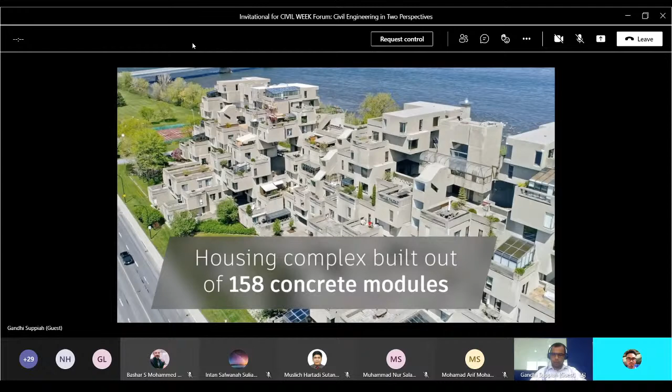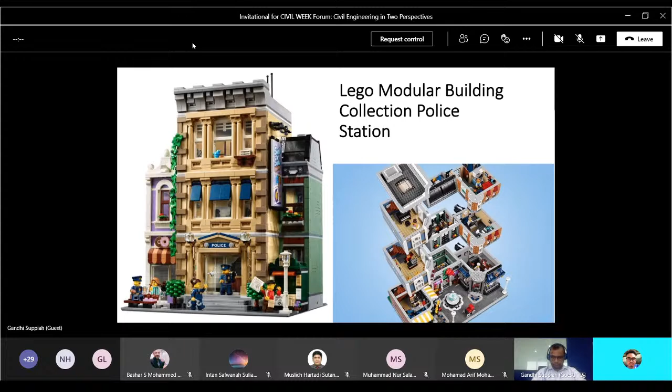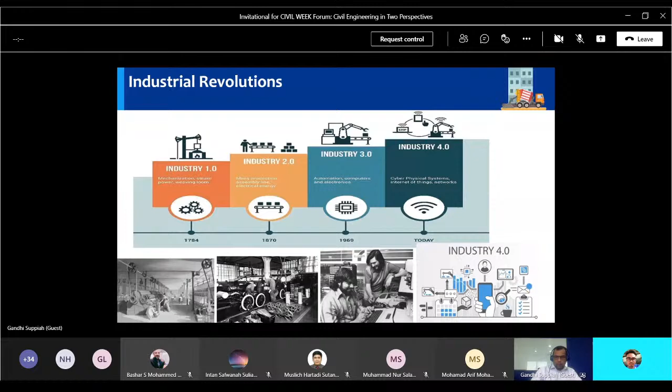We are now scaling up prefabrication more than ever. There was a period of time between 1969 to today where prefabrication or modular thinking was not thought of, wasn't popular, simply because people didn't want to live in the same sort of houses and same development, and therefore it dropped off in the 80s and 90s, and people weren't thinking about modular construction. But now in the 2000s, it's back in the frame, and that's what we're going to go through mainly.

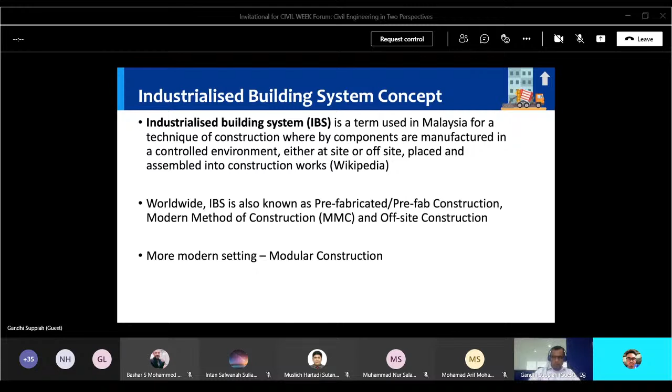So IBS, modular, and so on — it's a very simple concept, nothing difficult about it. It's really about having an architect draw up the plans, put it into a setting where you can think about using prefabricated components that can be manufactured together.

Then you go through and look at how many components you need, what type of components, how to scale up, how to set this up in the manufacturing context, and then start building it. You just start building it, put it on the back of a truck, take it to site, use a crane, and lift it in place. That's as simple as that.

Nothing too complex about it, in the sense that it streamlines the construction process, streamlines thinking, and allows things to be done faster compared to still building formwork and pouring into formwork on site, with the amount of wastage and the use of extensive foreign labor involved.

So IBS was thought about in Malaysia from that perspective of how to have better quality, better safety, and less wastage.

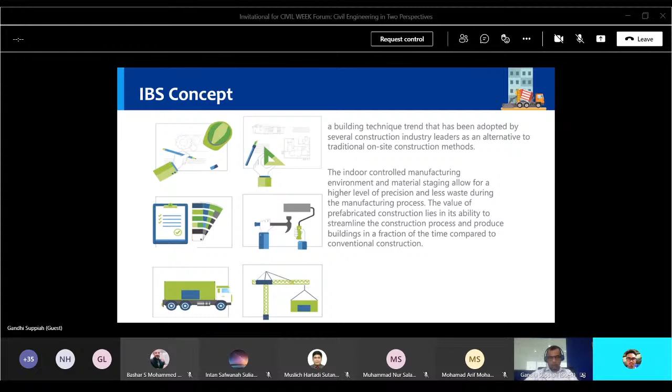But in Malaysia, it still hasn't really taken off. It hasn't become a big concept, although I was privileged to work with Dr. Kim Elliott in the early 2011, and I was one of the working committees for construction research about CREAM in Malaysia, where I contributed to the specification for IBS. You can find it on the internet and download it. It's a specification, but there are things I think you'll pick up that are good for research at this point in time.

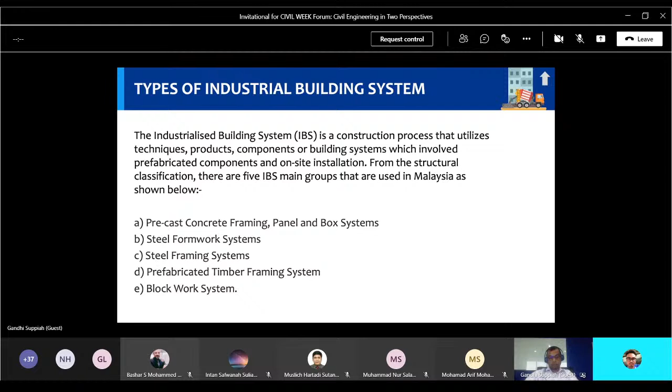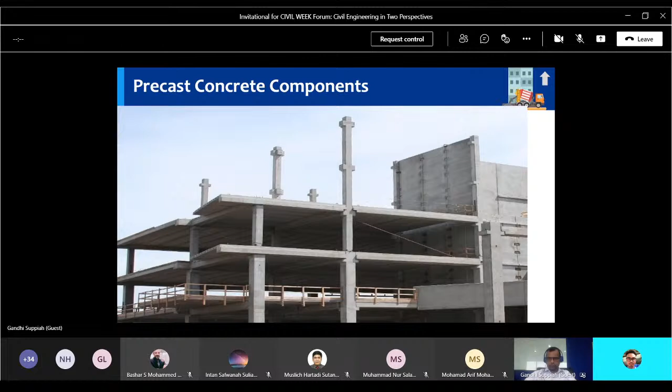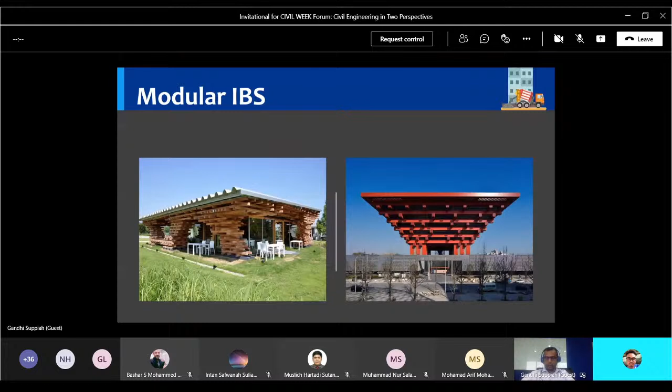But what you need to realize is the speed of construction here, and the number of people used, was lower compared to any standard buildings. Particularly the Shanghai Expo, this building is quite significant, 20 stories in height. It's an inverted pyramid with a lot of structural thinking, with a steel core holding it in place with piles, I think bored piles, as part of the foundation element.

Timber composite - as I mentioned, we don't use it that much - but construction using either pure timber or timber with concrete floors, that could be done either for internal floors or even for roof or walls. This gives quite a bit of rigidity to the building, but also durability built into it, and they could be made into panels offsite and lifted into position. Very quickly you can get through the other trades in there, like electricity, plumbing, and so on, because you're talking about timber wall panels that you could drill in, direct your electric cables through, or even pre-drill and decide where you want to go. This is an extremely fast form of construction used mainly in European countries, and that comes with insulation built into the wall and the roof, so it all comes together as a single component that then gets erected.

So I was working in South America, in the Falkland Islands, for about a couple of years, and I shipped in 20 containers of houses on a similar concept, where each container contained one house, 3-bedroom or 2-bedroom, and it was like Lego. The gangs, each house had a gang of 3 people, and they were able to get the components out and fit the house together with very minimum fixing requirements in terms of nails. I mean, yes, some screws, but they were all Lego - they had their own wood peg requirements in place, and each house was done in under a week. That was really, really fast. The foundation took longer than the house itself.

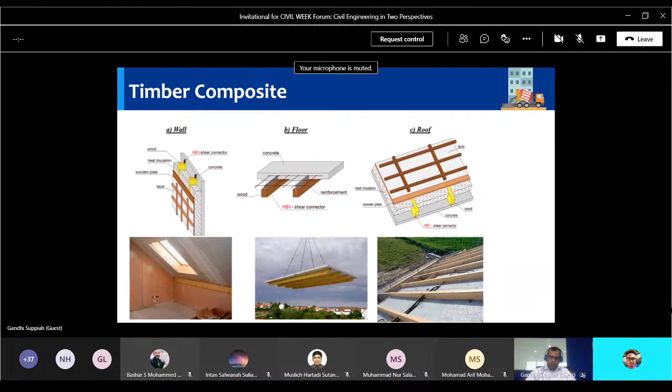So why modular? As you can see, standards - it's very precise engineering in a very manufactured environment that delivers consistent standards. You can have repeatability in a good setup. Doesn't matter how varied it is, what type of construction standard, whether it's BS 8110, EC European codes, or ACI American standards - it doesn't matter. You can engineer this in a very controlled environment.

The cost of constructing this on site is really, really low, and building this fast compared to traditional construction, where you can have delays from either material damage or variability. Variability in a lot of buildings comes from foundations, and when you do in-situ construction, you can end up with quite a bit of variability, and you could end up with various defects that develop over time, over the life cycle of the building, due to that variability. So modular construction, in life cycle terms, is cheaper, but what is not so cheap is setting it up initially to get the modular construction in place.

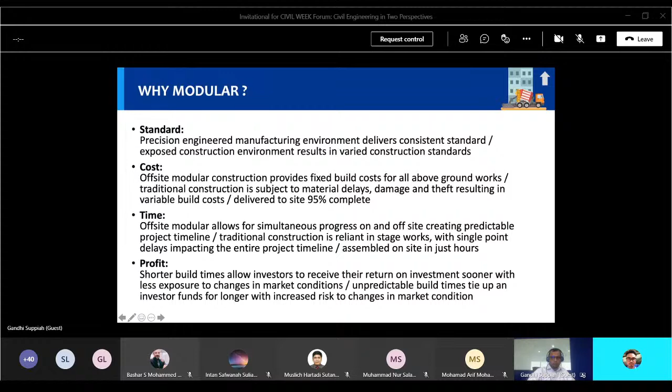So, what I meant about modular construction time savings.

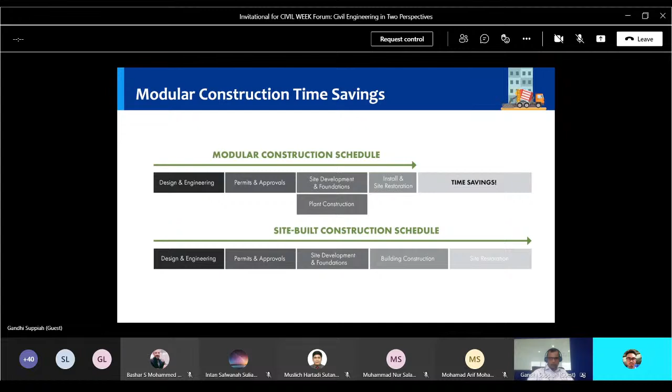When you look at traditional, site-built construction versus modular construction, it's pretty similar with the design, engineering, permits, approvals and so on, until it comes to the site development stage. In modular, you can get your plant constructing your components off-site in a controlled environment, and it's after this that building construction starts on site. Traditional construction is going to take longer, and when you look at that install and site restoration, it is significantly faster than traditional building, with a significant time saving.

This is a recent article from McKinsey that shows when you compare a 24-month construction period, traditional versus off-site or modularity in place, you can be between 20 to 50% faster. You could finish what might take you 24 months in 12 months. That's incredible - as an investor, you are getting returns faster, and as a person who's bought a property, you can move in faster.

You can see what benefits you can gain out of this, particularly when it comes to 3D volumetric construction using a modular construction technique.

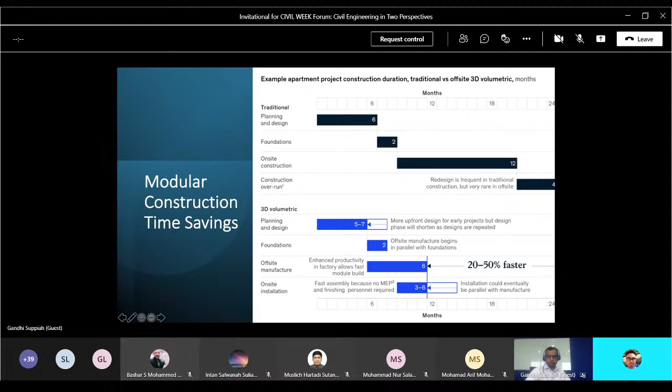So where is modular construction going now? Where is the direction of modular construction in this current space in time? With the Industrial Revolution 4.0 in the last few years, building information modeling is becoming more and more popular. I know we are still in the adoption phase in Malaysia, not used as widely as it should be compared to some of our neighbors and some parts around the world.

For argument's sake, in the UK, adoption of BIM in the construction industry is as high as 80%. In Malaysia, we are still lagging somewhere between 15 to 20% depending on the type of construction, and we have actually done more BIM in linear construction, that is highway construction, at this moment than actual buildings, although it is gaining high traction.

If you look at the image on the bottom right hand corner, that's actually an augmented reality setup, or even in your virtual reality space, where you can see where the modular construction elements are, how you position your MEP - mechanical, electrical, plumbing devices - and how to avoid clashes. You can do clash analysis using tools like Revit.

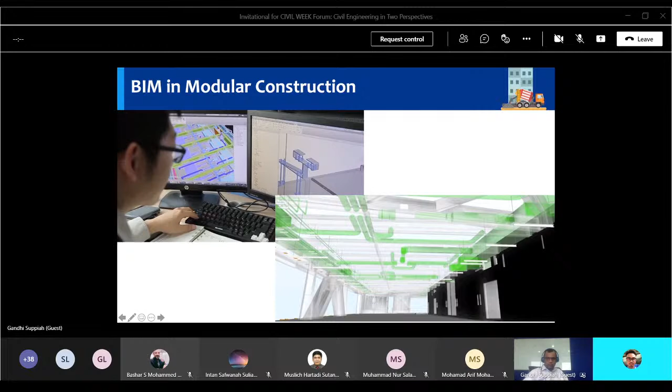This is a BIM module - it's a unit workflow using Autodesk, where you can look at all your modular components, segmentize them, and see how the modular elements are all tagged. Each one has its own specific identification, and they can be put together in a virtual space, constructed virtually before you go on site.

But what it also shows is the decrease in project budget. Now this is a bit of a controversial thing, particularly in this part of the world, because for engineers and architects, the project budget dictates their fee. So pushing modular construction and advanced technology has not been popular, because it can in effect reduce your fees. But I think we need to change that mindset about how engineers bring value using technology and modularity as a modern method of construction, and therefore they should be paid accordingly, not based on project budgets. Rethinking has to be done.

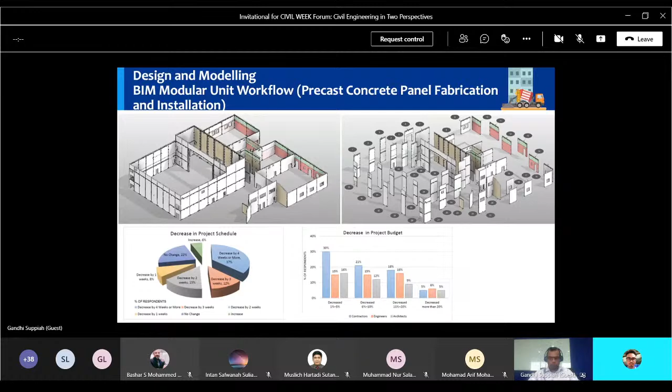BIM also in modular design can be used for site layout planning. You can plan how your lifts are going to be, how you want to position your crane, how you're going to lift components, how you decide on a lifting plan, and how you sequence your stacking.

And this is all done virtually now. This is quite standard practice nowadays in modular construction. If you look at some of the modular construction jobs, they've used this planning to go up to 4D to 5D sequencing, to ensure they can plan it, sequence it, measure it, ensure safety is part and parcel of this, and cost is measured carefully, so everybody knows what they need to do. This is a very collaborative framework, and these are the advanced construction methods now being used.

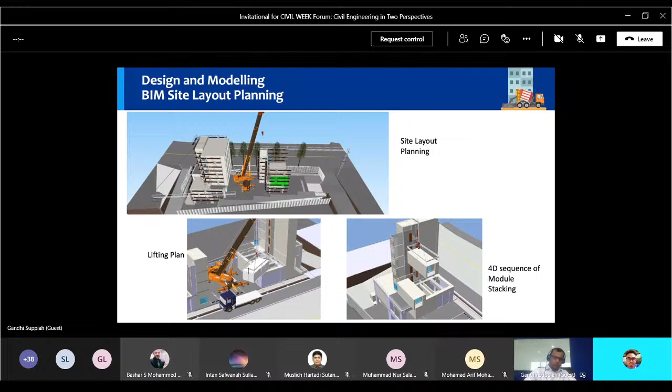Malaysia really is getting in there, but it needs to do more of this. For those in university now, it'll be worthwhile to learn this, because with future plans in Malaysia to build 100,000 homes, and Singapore looking to have major construction over the next few years for various modular buildings, and so on in the rest of the region, understanding this concept and knowing how to use it would be a great asset.

A building that used to take maybe 18 months for steel framework is now 50% faster easily, and the number of people working on such jobs is about 30% compared to before. There's not enough being done in this space in Malaysia at this point, but with new data centers and new requirements for various industries coming up, the modular construction with steel framework will come back. I think in the next 2 to 5 years, this will be one of the major areas pushing back up in the industry.

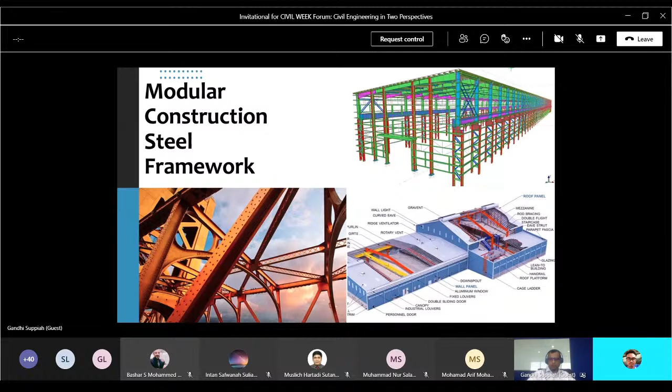Gamuda is one of the leading proponents of IBS in Malaysia, or more so modular construction, because they're talking about wall panels, not just individual components but volumetric construction, compared to some manufacturers who are doing just column beams, hollow core slabs, and so on. So I think it would be a good idea, once the MCO is over and things are back to normal, to organize a site visit to Gamuda's manufacturing facility, because it's a great place to go and learn about how modular construction is done in a very controlled environment.

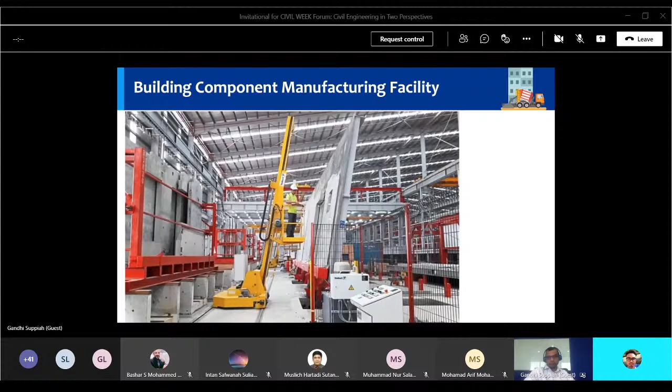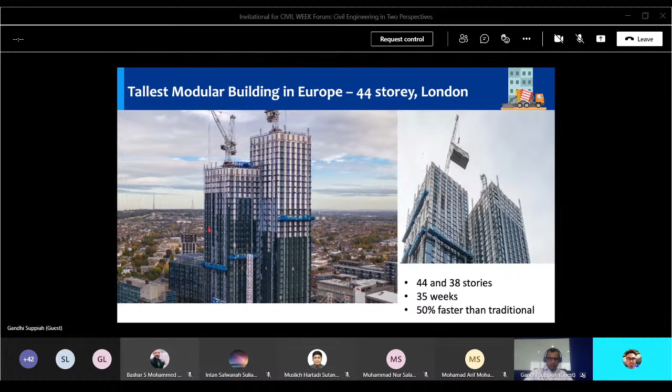So you can see where and who is leading this at this point in time in this part of the world. There are significant opportunities, and part of it is they're looking at reducing reliance on foreign labor, which is why Singapore is doing what they're doing, but also aiming for fast-paced, cheaper, but safer construction.

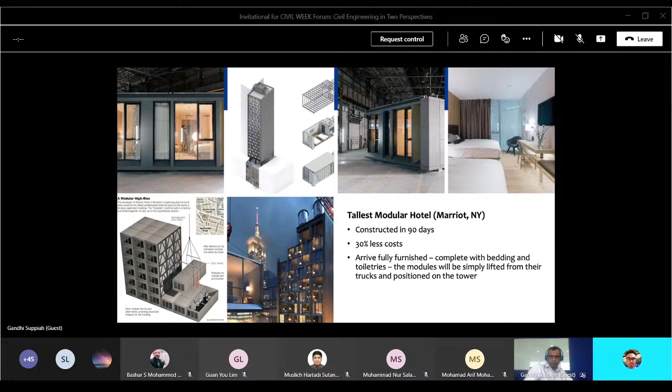Now I come to something closer to me. I'm a bridge engineer, but I've been involved in modular construction, IBS, or precast systems for quite a long time in my career. I also started my career in a factory, as a bridge engineer, on a short-line precasting facility, where we did box girders for a bridge across the Tagus River in Portugal.

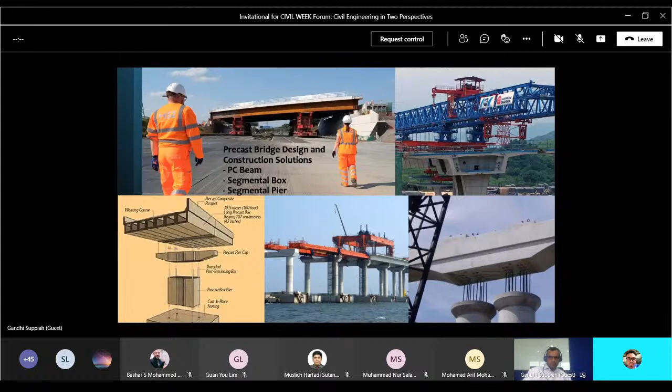But there are a lot of other variations and innovations where bridges could be constructed with purely beam and slab, with an in-situ slab or beam, or you can see components like precast piers, precast box piers, or pier caps, even casting. Even the footing sometimes can be precast, but in most cases it will be cast in place. This is high quality precision work done in a factory environment, or even outdoors with control required to steam cure it to achieve the same quality as an indoor environment, then brought into place and placed quickly.

Now the next evolution we're talking about is the modern method of construction, the offsite manufacturing. You can see the Marriott Hotel in New York is very similar to offsite manufacturing, but the reason it wasn't classified as modular is there's a variety of different components and elements of construction that meant they didn't fully classify it as offsite manufacturing.

Here, the whole components are manufactured completely offsite and just come and stacked in place. You could have shipping containers to do this, and there's a variety of homes now built with shipping containers as part of sustainability, or a circular economy, using shipping containers that aren't being used to construct homes, classrooms, different buildings.

The speed of production is even faster than modular construction. It is cheaper to some extent when using steel framework. You don't need to do major setup compared to a concrete framed modular building or even offsite, because concrete particularly could be quite heavy to lift, while steel is faster and quicker to do such things.

It's validated, it's tested on site, off-site first before it comes and installed, so everything is checked out. Safer, very few labor is required to do such things. Completely done classrooms can come in place, or as you can see, hotels, hospitals even, can come completely manufactured off-site and then be put in place, and could be there within 2, 3, 4 months.

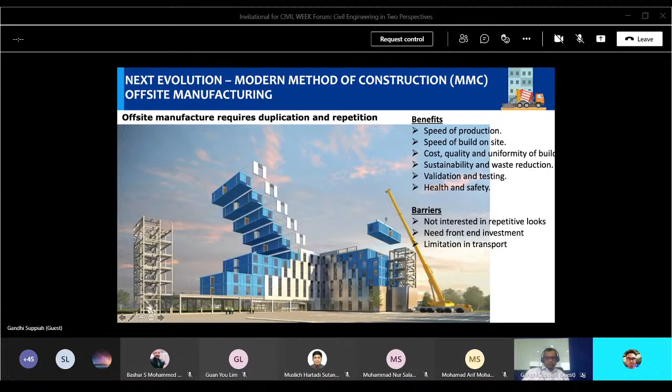So the next evolution in this, of course, is 3D printing, additive manufacturing, where you are talking about robotic arms or a gantry crane type system, which is printing using sustainable material, like rice husk combined with cement additive. So it has a sustainability element built into it, and it is very fast - you can have a home constructed within days when you use such systems.

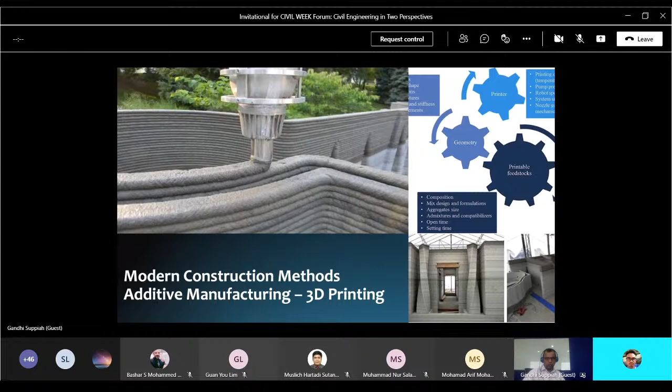And Malaysia has and is considering manufacturing, but then we need to tackle modular construction first before we jump into additive manufacturing. But then I think we should look at doing some trials in the future and see how fast we can build in rural areas and get housing done for people who are in desperate need of good homes.

This is just an image of a 3D manufactured home using additive manufacturing or 3D printing. It's a virtual model that looks at how it will be done and how even the roof components can be put in place using different cranes. It's a game changer. It is going to happen very fast, and you're talking about just 2 to 3 people on site, and you can have homes done that look different. You don't need that repeatable look from off-site manufacturing - you can have architecturally looking homes with 3D printing.

So what's the future demand for modular construction? If you look at modular or off-site construction, and the increasing scale and complexity of the different types of components, it's now being driven by the cost of labor going up, but also the amount of foreign labor that you don't want to bring into the country, and the shortages that are happening because of that.

The biggest traction is happening in Australia, which is really big into modular construction. It's also in the UK, Singapore—I showed the building earlier—and the US West Coast. So it's a modern method of construction, a demand that has been driven, and it's growing faster than any other form of construction at this point in time for buildings and housing.

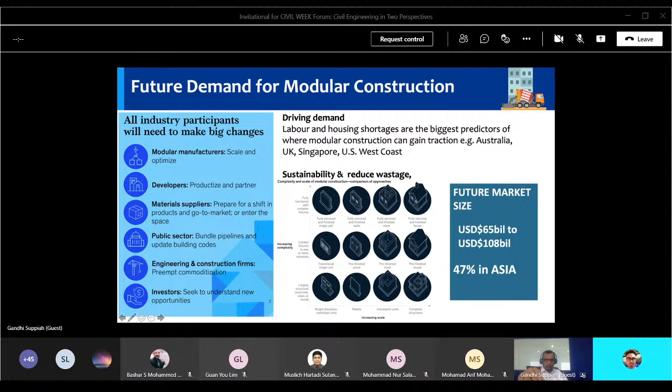Finally, I want to go through future material development. I've got probably another 4 or 5 minutes on this. These are future developments of materials that will be built into the modular construction area, and I'm particularly talking about concrete here.

Ultra high performance concrete—typically in university you learn about grade 30, 40, maybe 50, but I'm talking about grade 80 to 150. When you use such high grade concrete, you can slimline or make your components thinner with similar strength, but you have to tackle durability and brittleness issues. It can be tackled though—I've got a bridge I'm working on right now using grade 110, and KL118 is also using somewhere in the grade 120 to 130 range for their concrete, to make components like their core walls thinner.

The next one is light transmitting, or light-emitting, concrete. We are now developing concrete that is able to absorb light and emit it during the nighttime—like built-in photoluminescence that extracts sunlight over the daytime. So on highways, instead of painted white lines, you can have concrete paths lit up using light transmitting concrete. You can have signboards with light transmitting concrete, or use it architecturally on building facades. All this can be done.

Thank you for this opportunity to address the UTP students, our beloved civil engineering students. I would like to give my salutation to the department chair, Engineer Dr. Bashar Mohammed, and all my colleagues from the civil engineering department. I am truly honored to share this because it has an important implication for the students today.

Now, especially you young adults, you must know that as of today in the marketplace you have people from the baby boomers — I am from the baby boomers, born from 1946 to 1964. You have Generation X, born from 1965 to 1980. You have the millennial generation, born 1981 to 1996. You have Generation Z, born in 1997 or after. And of course Generation Alpha will be coming, born 2010 or after, but you will not see Generation Alpha for quite a while.

Perhaps in 2030 we'll see Generation Alpha coming to UTP. But at the moment, Generation Z is today's generation. Just imagine, I am actually 3 generations behind you guys now. There are definitely a variety of challenges you will see in how people interact with each other. In the workplace today, you will see these 4 generations interacting with each other — with the exception of Tun Mahathir, who is from the builders generation, 1 generation behind me.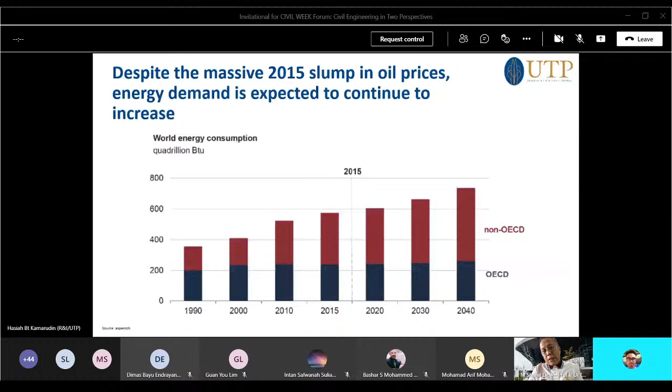Next one, Asia. So as we see the slump in oil prices, you will see that there are a lot of other energy alternatives starting to come in. Nuclear has always been a steady state. Nuclear has always been part of the Western world cartel business. Nobody else is allowed to have this nuclear business.

Iran tried to do that. They got attacked all the time, for example.

And then you have renewable. Renewable is on the uptrend. The green color - depending upon if you are colorblind or not - it's on a rising trend, since the drop of the oil price in 2015.

And then you have the natural gas. Natural gas is supposed to be a clean source of fossil fuel. I think it's probably the cleanest at the moment.

Coal is bad, guys. Ladies and gentlemen, I'm going to tell you, China is one of the worst culprits in using coal. Malaysia is no different. Some power plants are still using coal. You go to Tanjung Bin, we are using coal. You go to Lumut here, we are still using coal. These are very old ways of doing business, but you can see that the demand for coal has dwindled, the energy arising from that.

And then the other one that we have is actually petroleum and other liquids. Those are on the increasing trend. And these are the shift in the energy sector. Next one.

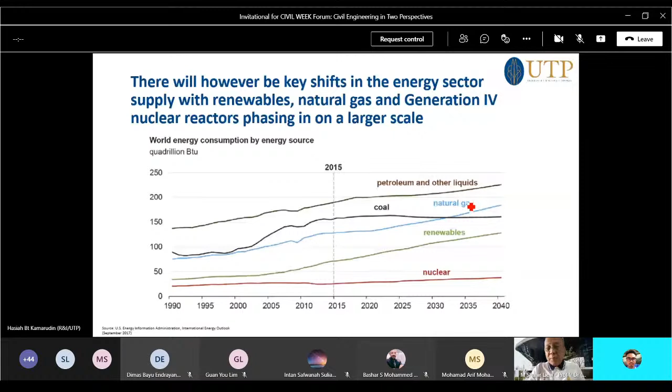And as you can see from here, even though we have a shift in the energy, you see that the increasing lease operating expenditures is reduced in expenditure and capital project, although energy demand is growing. Why is that? Very simple, guys. If you do not meet the average cost per barrel of oil, then you are not going to invest more in finding new fields. This is the problem today.

But fortunately now, I think the oil per barrel is beyond US $60. This is good, right? This is good for everybody. In fact, if you look at US shale, for example, there's a drop in the price over the years. Offshore oil and gas has dropped in price, and conventional has also dropped in price. Saudi Arabia, the largest oil producer, can produce oil for less than 10 US dollars. They can make money for anything that's less than 10 US dollars per barrel. This is the fortunate part about Saudi Arabia.

But the unfortunate part about them, 87% of their GDP depends on oil and gas. So you can see this is a very bad proposition for Saudi Arabia today. They have to diversify their economy, which is why MBS is doing a lot of things to Saudi Arabia to make sure that they diversify their economy.

Brunei is doing that. They are dependent on oil and gas in a very big way. Malaysia today is oil and gas dependent up to a tune of 27% of our GDP. So I wouldn't say it's bad. I wouldn't say it's that good either. I think typically you want to be dependent on oil and gas to about 10% of your GDP. That's about it. So these are some classic examples, because oil and gas are very volatile, traded in the market.

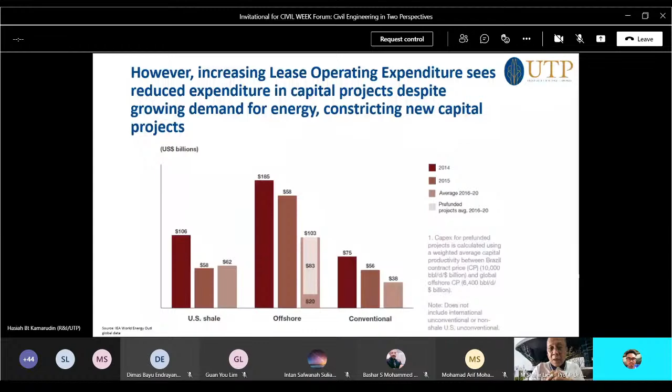It will follow the market trends. Next slide, please. So as we move along, you will see the dwindling effect from the price of oil and gas. It drops from a high of 130 US dollars to 28 US dollars per barrel.

Hey guys, in my lifetime, I have seen a drop in oil prices 3 times. One time when I was in Texas, it was about 8 US dollars per barrel. I was pumping cheap petrol. I was driving a V8, a 5-liter engine that is a major gas guzzler, but I didn't feel the pinch because oil was cheap.

You are looking at that drop, and when you translate that, you have not much margin to play around with.

And in Malaysia, we depend a lot on offshore oil. I think we are doing quite well now. We are moving to a lot of other countries. In Mexico, we have 2 blocks, for example. In Gambia, we have another 2 blocks. In some of the African countries, we are developing some of the fields.

Petronas are typically smarter because we tend not to follow the crowd, in the sense that if there is oil and gas, it doesn't mean that we will explore that. We must make sure that we make money out of it. So we are more conservative in our approach.

So what I'm saying is, digitization, what else can you look at when the oil price drops? When the oil price drops, it means you have to cut costs. Your fixed costs, you cannot change that.

I have an offshore platform. I have people operating from the offshore platform. I have my business that I have to go on. I have to produce 100,000 barrels of oil per day. I have to continue to do that, and that will keep on coming out from the ground. As long as that's coming out from the ground, you need to balance it. And the only way you can balance it is through operating costs.

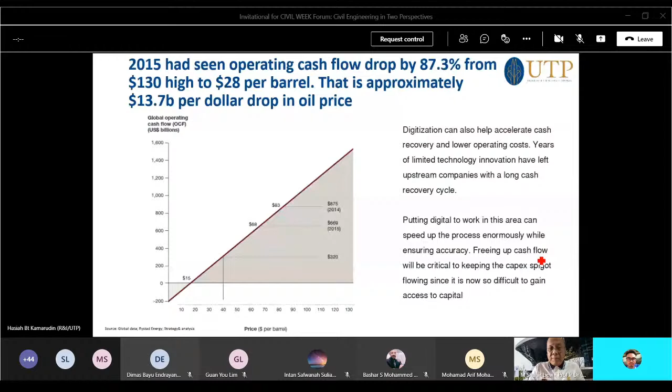On top of the 2015 oil crisis, you will find that new trends have emerged, changing the energy outlook considerably. First, you will see the rise of new hydrocarbon resources - that is where you look at unconventional oil. America is very smart. They always buy oil, keeping theirs as a reserve. Anything goes wrong, they start digging their oil, and then they push the price down.

So Saudi Arabia and OPEC countries no longer control the world market. You guys got to remember this - there's no way they can do that anymore, like in the old days during the Yom Kippur War between Egypt and Israel. The other one is a changing geopolitical equation. Things are changing very rapidly. You have to admit that we are part and parcel of that changing geopolitical equation. China is coming to the South China Sea. I think the Mat Salleh suddenly realized they made a mistake by calling it the South China Sea - they should call it the Malaysian Sea.

Malaysia can claim that it's our sea. Now we got South China Sea, China is claiming the whole sea belongs to them. This is the unfortunate part.

The other one is greater penetration of renewables. There are a lot of innovative ideas in renewables, and then you got new technologies and material for hydrocarbons. I think this is something we look at. We're going to look at other kinds of material for pipelines, for example.

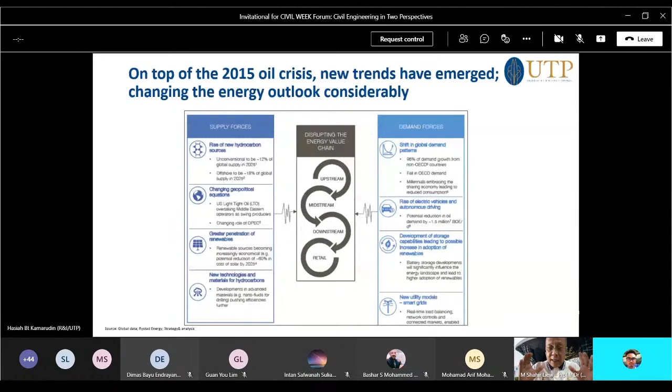So there's a lot of research that has been done. UTP has been part and parcel of that. Petronas is doing that as well. In short, there are a lot of things that is not perfect science, perfect engineering as it is. At best, it is an experimental stage. Tesla is an experimental stage, for example, and so on.

So why digitalization in oil and gas industry? You as an engineer, I will share with you some examples on how you look at things. When you have digitalization in oil and gas industry, because you have a smarter society, you empower the organization to do more using less. So in essence, there will be some jobs that will be lost, okay.

Gone are the days you have secretaries. Secretaries are old school, right? During my time, secretaries were very important. Why? I come back from the site, I look at my messages, secretary takes all the messages. Today, I don't need that. People call me on my handphone. We WhatsApp all the time. We talk to each other. We are very, very productive, actually.

But there are people who are going to lose their job. Accountant - do you need an accountant when you can actually program your ledger, your bookkeeping into a software that will do all the thing and give you a full financial report? You don't need an accountant. You need people who can interpret numbers, yes, but you don't need an accountant anymore.

Do you need a lawyer? People are - I know, like in UTP, we are trying to help Tabung Haji in digitalization, in coming out with artificial intelligence. Similar questions that are asked all the time, you track those and then it gives you the correct answer all the time. This is for the Hajj pilgrims, for example.

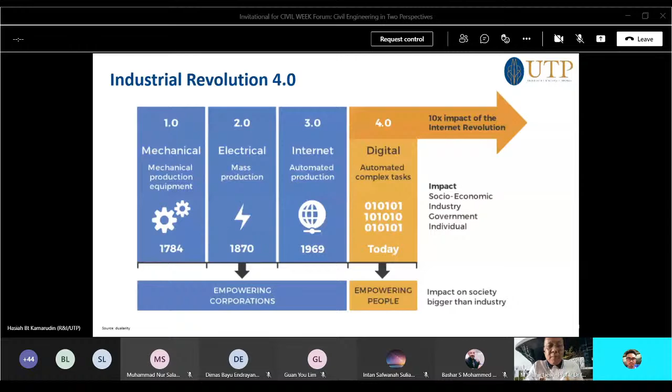So when you look at these, these are the 4 key areas in oil and gas. You can be part and parcel of this if you're civil engineers. Number 1, exploration - find oil and gas more quickly. This is one of the ways they have looked at that. I will share with you on that. Yeah, you can speed up the overall time.

When I first saw our CSI, Center for Seismic Imaging, I told them you must look at AI one day to predict where the oil reserve is going to be. You cannot be plotting based on the data logger you have obtained - it's not going to be the way of the future. That is going to be laborious. And sure enough, this thing is moving in that direction today. If you don't adapt, you're going to die. So that's the first part.

Second part - you extend the lives of oil and gas fields because you have enough data. You can integrate the oil and gas production operation across the entire field to support enhanced recovery methods. So actually, it's a combination of CFD, computational fluid dynamics, and software with the data you obtain - you can actually enhance the life of the oil and gas field more accurately rather than by guessing.

Third one, asset management - you can maximize the return on your asset. Civil engineers have this problem. Every time you go and look at an old building, you look at them and say, guys, I want to have the as-built drawings. You know what they tell you? Oh, go to hell.

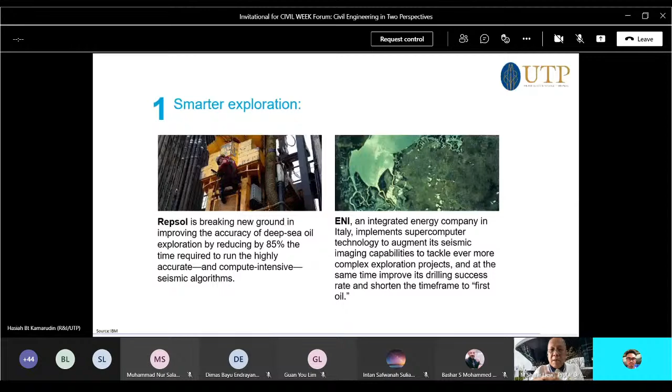The other one is smarter production - using predictive maintenance for equipment failures. In the past, your professor would always tell you that if you can get the accurate formula, use it, and forget about empirical formula. But today, when we talk about predictive maintenance, it's all empirical formulas - there's no exact formula anymore. As you add variables, it gets more and more accurate. But who is going to analyze those variables? You cannot use a hand to do that, but you can use digital technology to do it easily.

Back when I was analyzing data for my PhD in 1986, when I finished, the program I used - I'd hit return, go back home, and come back 2.5 days later to get my output. That's how slow it was. That was IBM, guys. And these were Cray computers - Cray computers were responsible for putting the space shuttle into orbit, but they were still slow. Today, you can do the same thing on a laptop.

Amazing. That's why I'm saying this empirical formula approach to predictive maintenance is something we have to look at very seriously now. There is a fundamental involved in that, but we do not have a clear demarcation of what that fundamental stands for. So a lot of these formulas will no longer be accurate at the end of the day when we talk about predictive analysis.

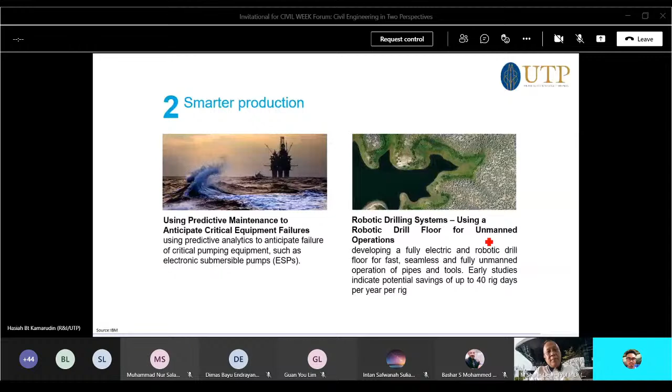And then smarter asset management. If you ask people where the assets are, what are the parameters in the asset, a lot of times they don't have that. They have it, but in analog format, so they have to digitize it. One of the things that people have been engaging students to do is digitize their data. This itself is a big business, but it's a low-end business, they don't pay you much. All you do is key in the data into the computer, then it can be computed and analyzed using digitized methods. This is something that has been ongoing at the moment.

I think there will be more and more efficiency. You will see that in the future as far as asset management is concerned. So project management, construction management, they'll tend to get easier and easier. BIM, for example, is actually generated from the oil and gas industry. They look at how pipelines don't clash with each other on top of vessels, for example on top of a production plant. They did that a long time ago, but they didn't call it BIM, unfortunately for them. But today civil engineers know it as BIM, so we use it for buildings at the same time.

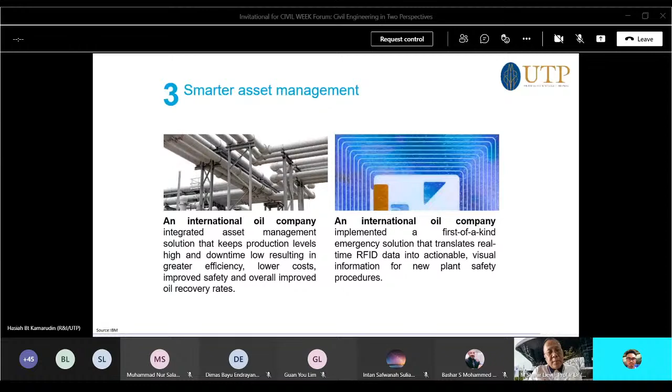Then there's structural health monitoring. This is our project in the civil engineering department. We did some pilot studies. I'll give you the monopod, the center one as an example. That's interesting - that platform, if you go there, you won't last an hour, you will vomit. That thing moves, it vibrates, and the period of vibration will affect you. It's not about failure, it's not that. They will just keep moving, just like a column standing. They have mooring lines, so all it does is move. You can feel it. What happened is they felt like something was wrong with the platform. So we went there and did structural health monitoring. We have the algorithm, and eventually we found out that one of their risers was loose, it had come loose from the platform where it was welded, and that solved the problem. It would have taken an inspector a long time just to find out about that.

Since then, this technology, structural health monitoring, has been done by different faculty members in civil engineering. Dr. Hisham focused on the onshore side, our other offshore team focused on the offshore water side, and so on. So these are areas where you use technology - you've heard the word digital twin. What you see over there and what you see over here, they are similar. This is another area that has been fully developed now. Actually, going forward, UTP is going to have its first startup in terms of structural health monitoring. We are the pioneer in this area, and we will continue to do that.

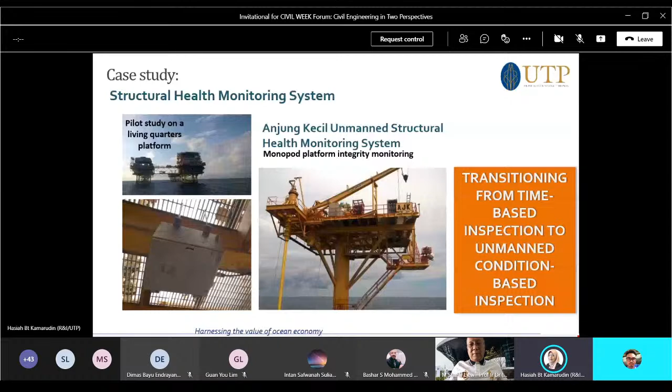And then the other one is about smarter workforce collaboration. You're talking about reduction in injuries. For example, we are doing virtual reality training for people on offshore platforms. By putting on the virtual reality, they can see the actual platform.

In the past, you attend a class, they tell you what you can do and what you cannot do. But today, when you wear the glasses, it shows you the real life platform, what you can and cannot do. Similar technology as an engineer we are putting together for Tabung Haji, for the pilgrims. In the past, they have a course with a small Kaaba, and they ask people to do tawaf and share with them what you do when you go there. It's kind of funny, right? These are physical processes.

If you put it in VR, you can actually see the real Kaaba. You can digitize the whole frame of the Kaaba and what is around it - Marwa, Safa - and you can know where the Aziz Gate is. You can show everything in VR. So when people go there, they're smarter, right? It's not like 2D pictures showing how it looks like. So these are some of the smarter workforce collaboration involved in using that.

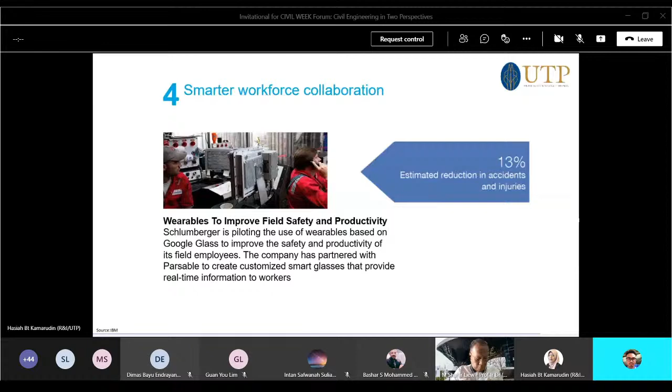How does a civil engineer like myself know this? It's very simple - civil engineers do project management. Project management is about managing data well, knowing the sequence of things that has happened at any point in time for the project. When you apply that in the halal industry, it works the same way. It's about data keeping, and how do you make sure data keeping is good? Using blockchain technology, because every person should endorse and sign off every time we agree on certain things.

Similar with project management - you get an architect to sign off, you get an engineer to sign off, you get an owner to sign off, and then you issue a variation order to the contractors. Please do this, that's it. So these are the things of the future.

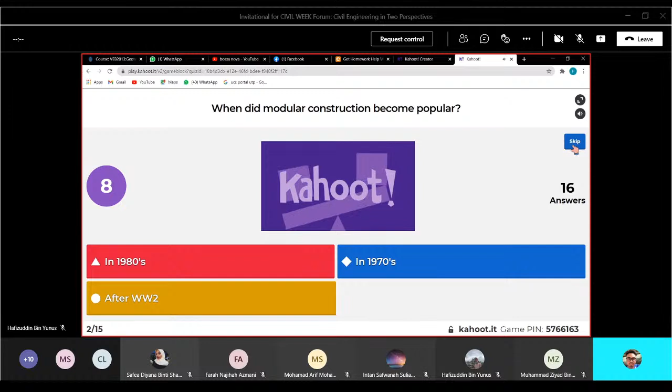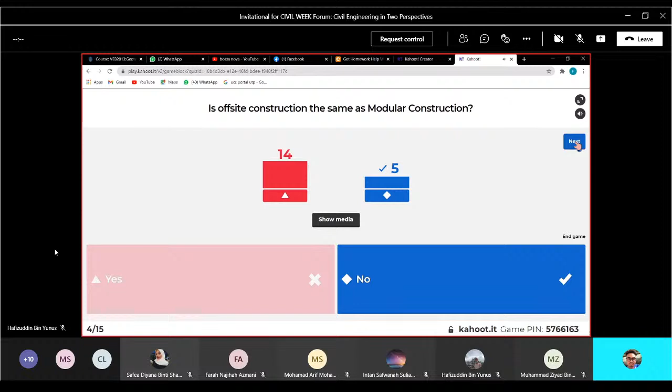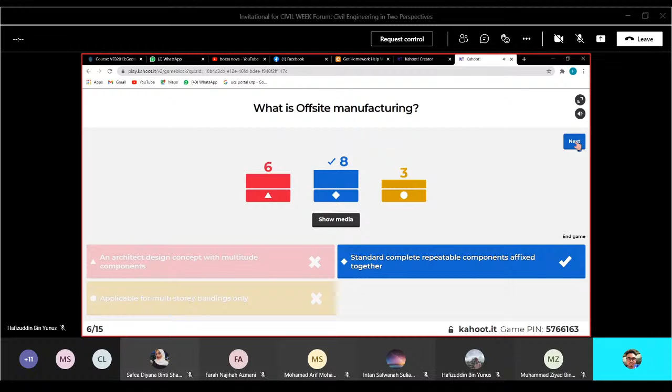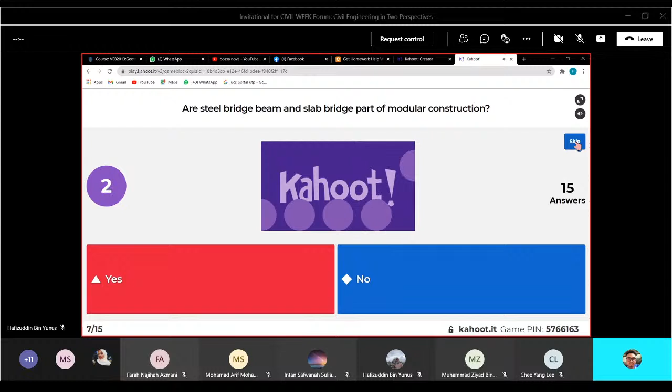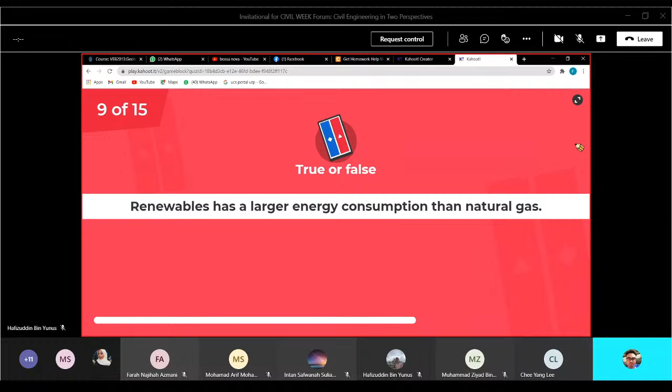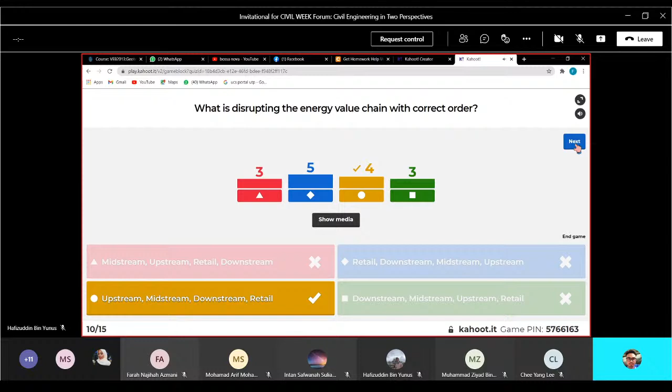Din, stop freeze, stop freeze, stop freeze, stop freeze, stop freeze. Ya, jangan tekan next, jangan tekan next, jangan tekan next. Okay. Jangan tekan next eh.

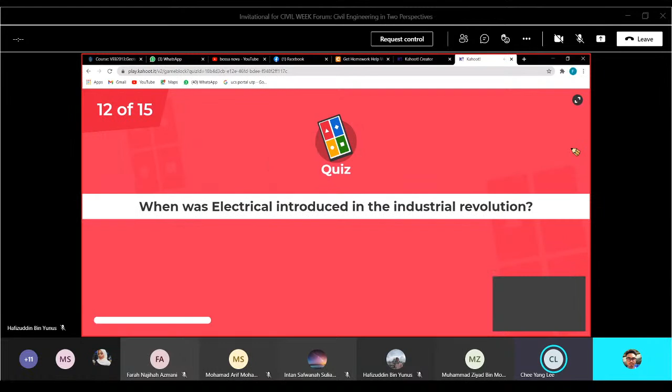Our last three questions. When was the Electrical introduced in the industrial revolution?

Number 13 question. These are one of the four key areas within the oil and gas industry for digitalization application except for...

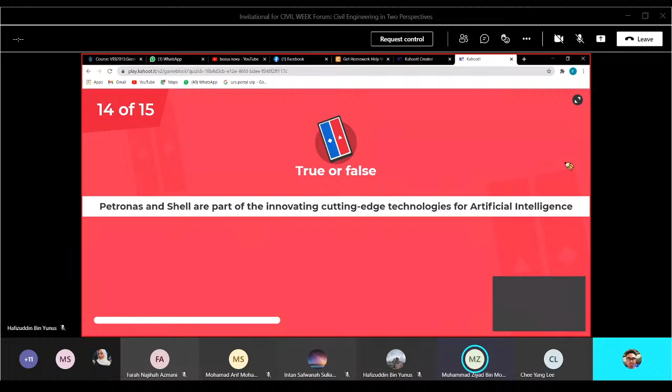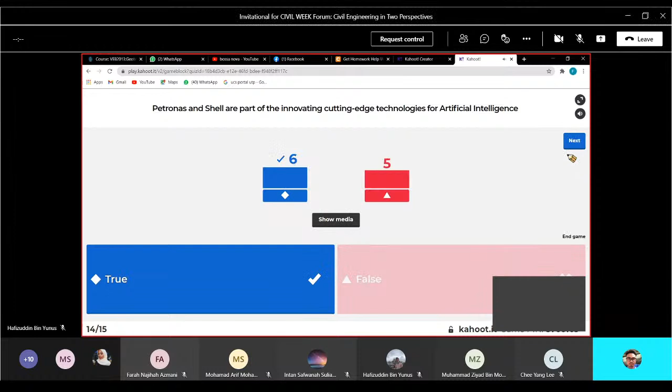Congratulations on getting third and second place for the forum session goes to Diana. Well done for getting second. Finally, our first place goes to Ahmed. Congratulations on getting first place for the forum and quiz section for Civil Week 2021.